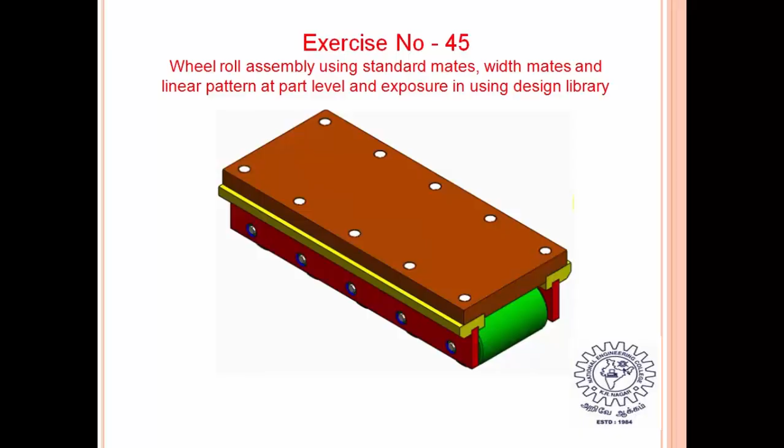First, click New Assembly, then select Insert Components. Browse for the components to be assembled. Now fix the component, and again select Insert Component.

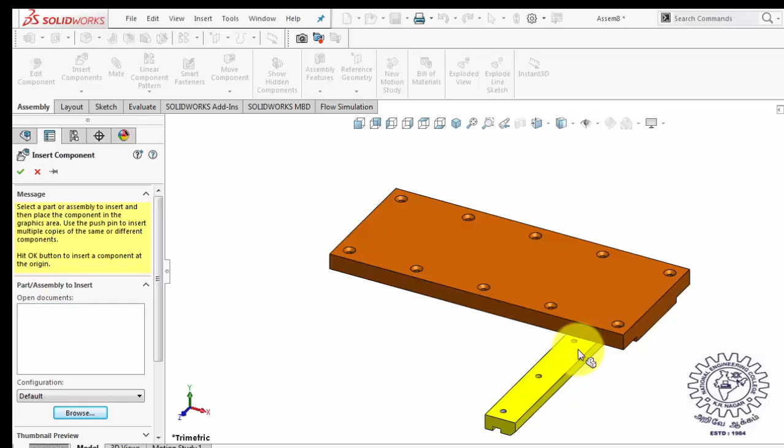Then search for the component to be assembled. Now select the face of the new component and the base surface of the fixed component and give coincident mate.

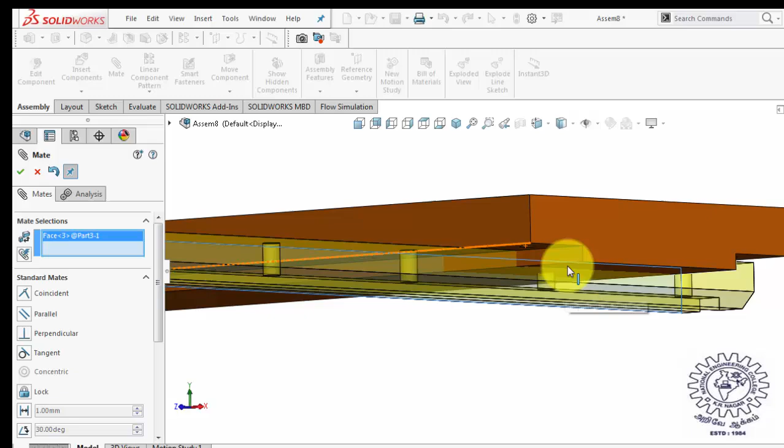Now select the side face of both the components and give coincident mate. Select the end faces of the components too.

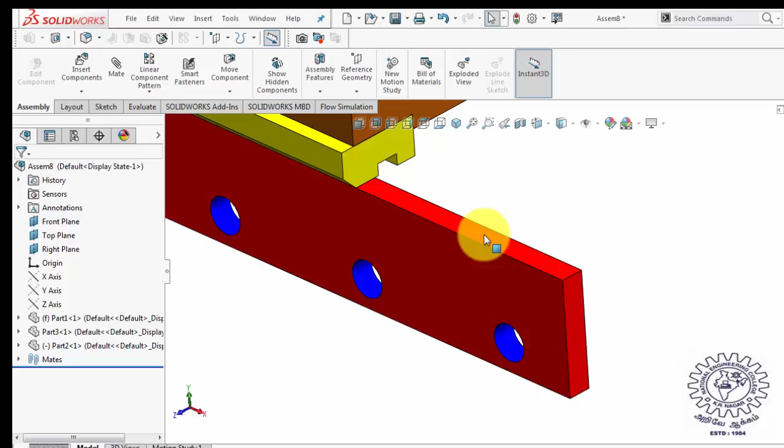Now select insert components and search for the new component to be assembled in this part. Now select the top face of the new component and the slot of the assembled part and give coincident mate.

Select both the faces and again give coincident mate.

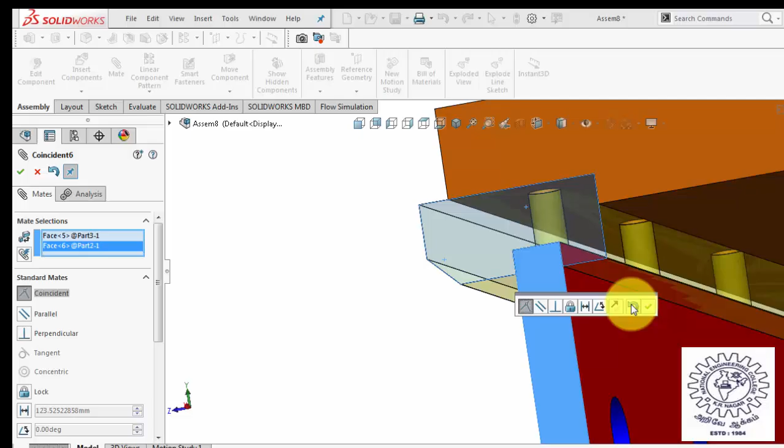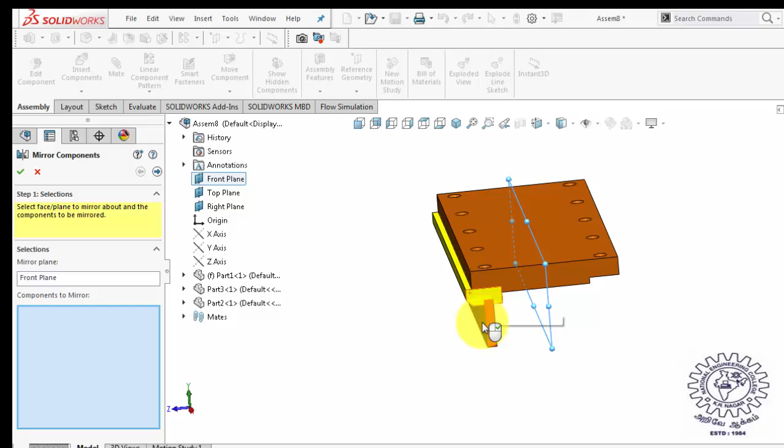Now under linear pattern command, select mirror components, and select the front plane of the assembled part as a mirror plane and specify the entities to be mirrored.

Now select insert components and browse for the new component to be assembled within this part.

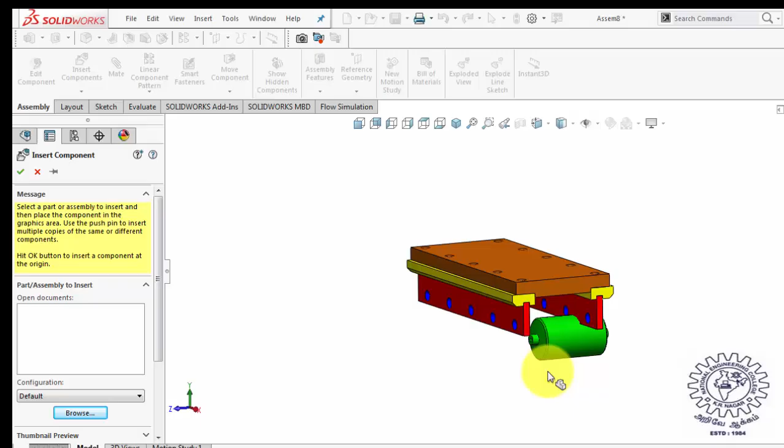Select the projection and hold within the assembled part and give concentric mate. Prevent the rotation using lock rotation option.

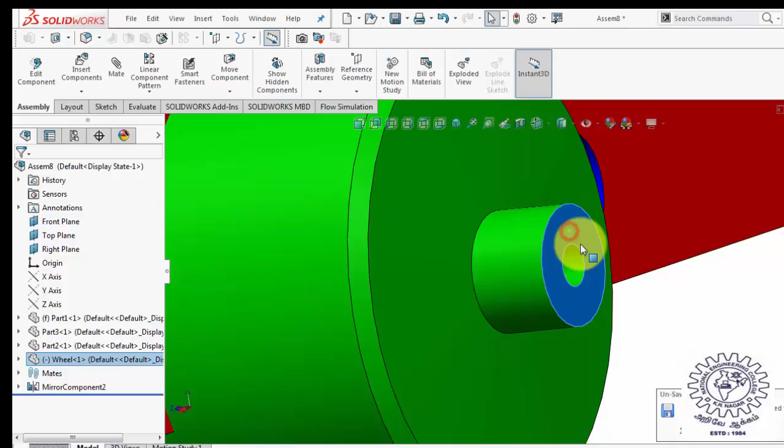Now select the outer faces of the assembled part and the projected face of the new component and give width mate.

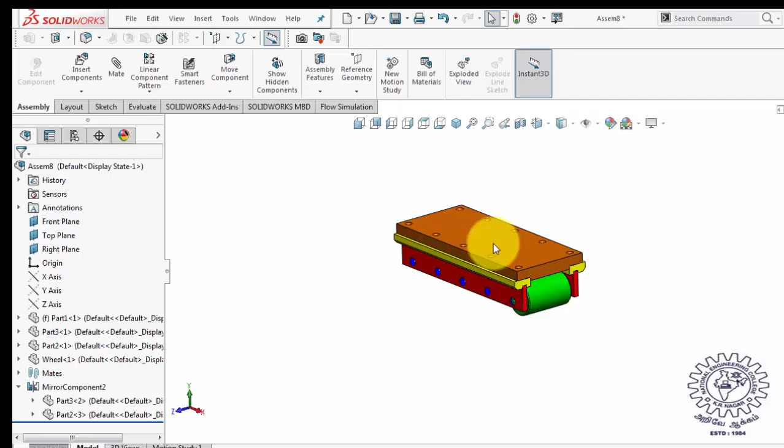Now select linear pattern command and specify the direction of the pattern as the edge of the fixed part and specify the dimension for pattern. Finally select the entities to be patterned.

Now in design library select toolbox, search for IS and select it. In bolts and screw, select countersunk head and select countersunk square neck.

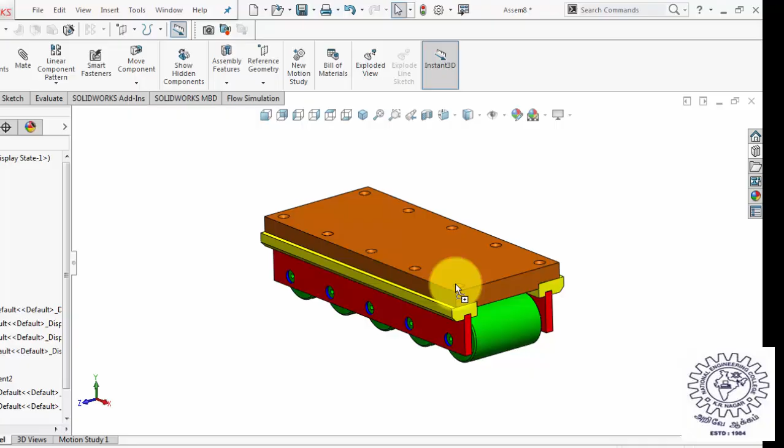Now select the hole in which the bolt is to be inserted in the assembled part. After selecting, click OK.

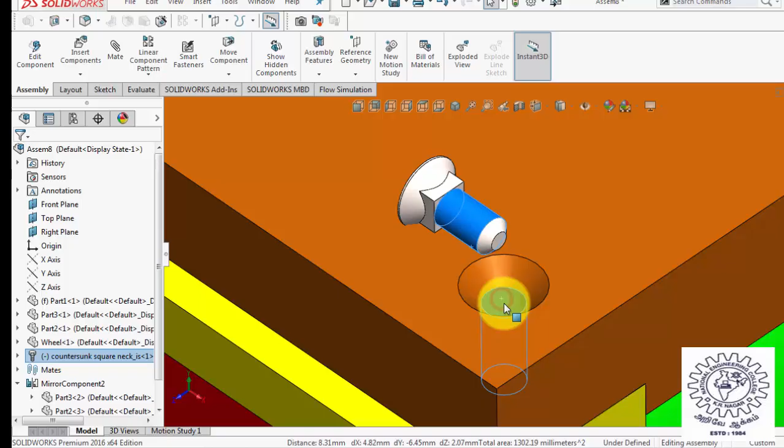Now select the surface of the bolt and the inner hole within the assembled part, then give concentric mate. Change the mate alignment.

Now select the top surface of the assembled part and the bolt and give coincident mate.

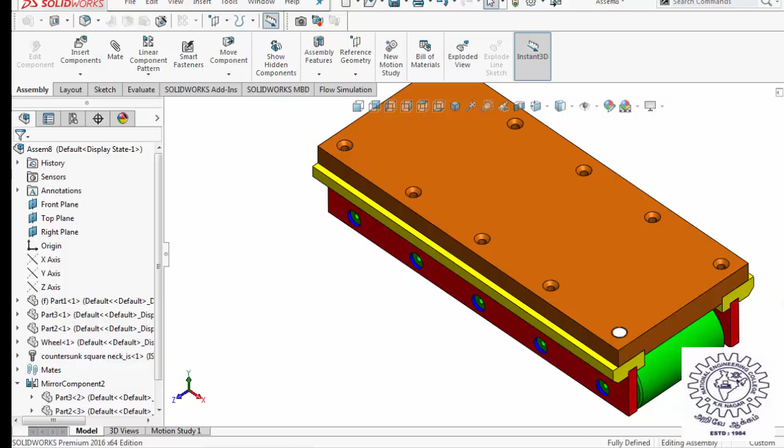Now select linear pattern, then specify the direction of pattern as the edge of the assembled part and the dimension in which the pattern is to be produced. Finally select the entities to be patterned, which is the bolt.

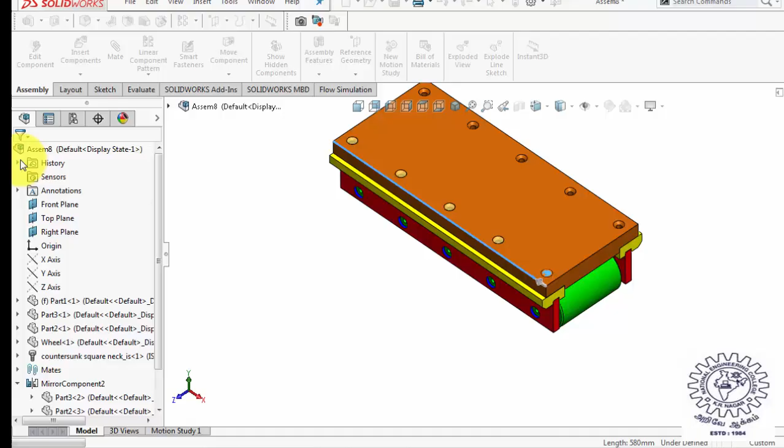Now select design library, then toolbox. Under bolt screws, select hex head, then select hexagonal fit bolt. Specify the dimensions of the bolt and select OK.

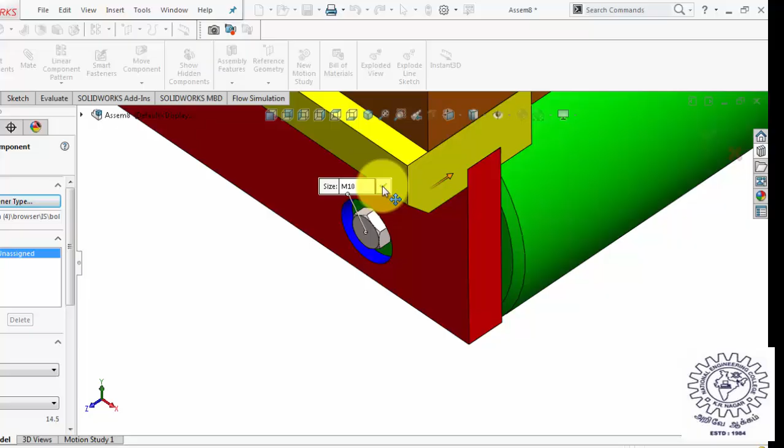In the assembly, in order to prevent the rotation of the bolt, select the mates of the bolt and in concentric, give lock rotation.

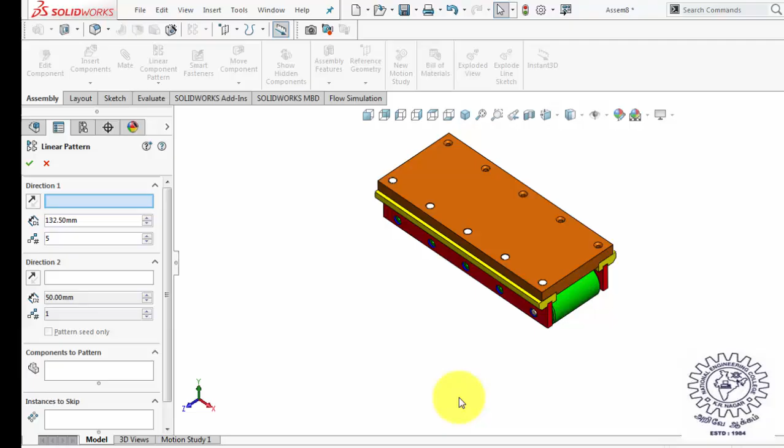Now select linear pattern and specify the direction of pattern as the edge of the assembled part. Select the entities to be patterned, then specify the dimension in which the pattern is to be produced.

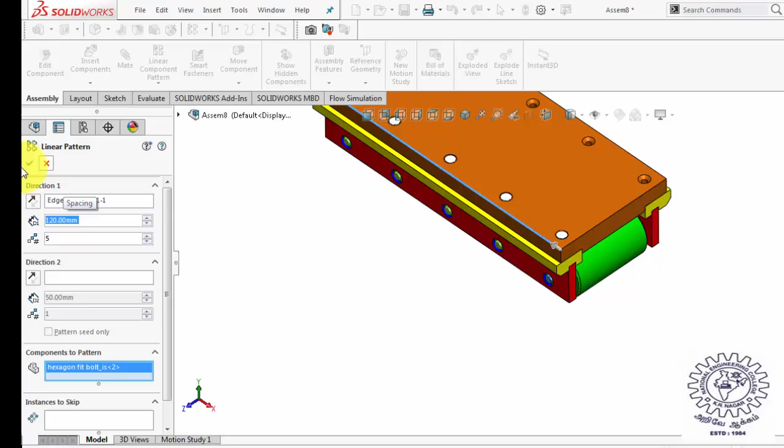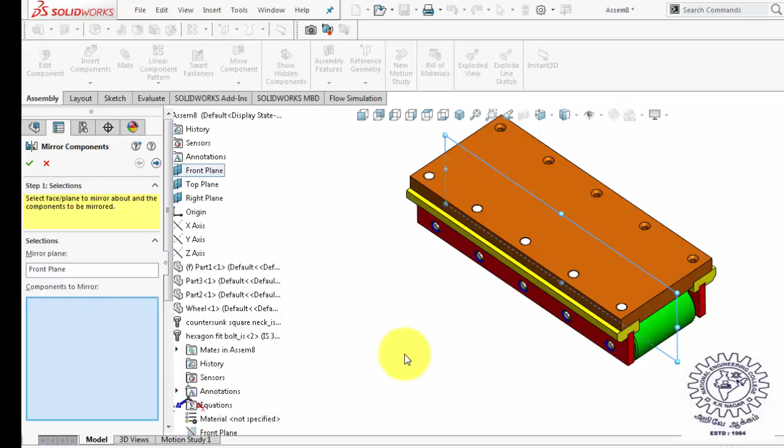Now, under linear pattern, select mirror component and select the front plane of the assembled part as an axis of mirror and select the entities to be mirrored.

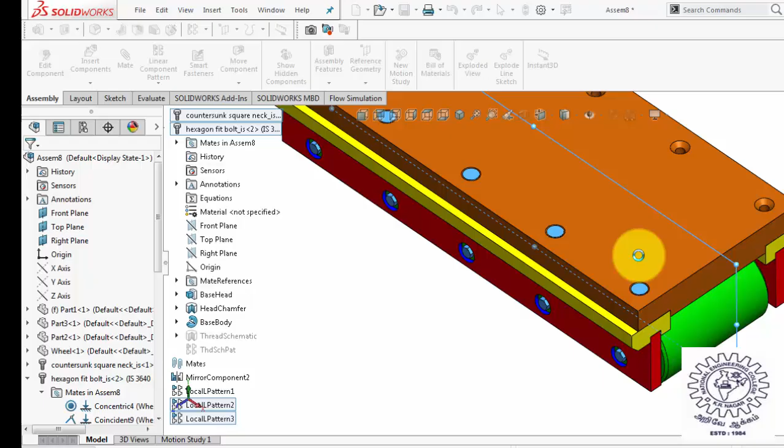Which are the bolts and its linear patterns. That's it, our assembly is done.